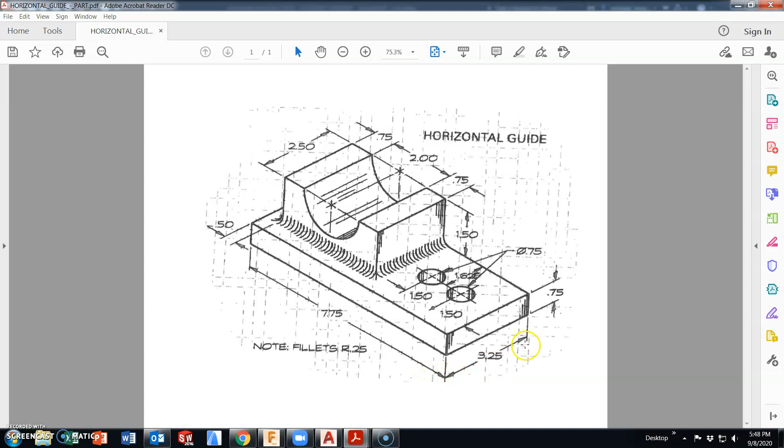For this tutorial we will be looking at the horizontal guide, which you were given a handout that looks like this. Front view has an overall length of 7 3/4, with a width of 3.25 and an overall height of 2.25. This is the one we're working on throughout this demonstration, and with the time allotted, we hope to get to this point.

One of the new things will be adding fillets, which are a radiused arc, and also creating center lines for the holes. That shows the vertical axis, letting you know from this view that this is a cylindrical cut instead of a rectangular cut.

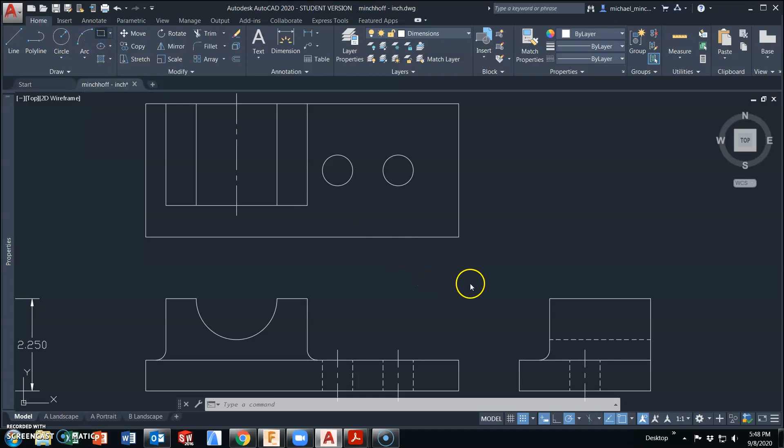So, start off with some view layout with a rectangle at 7 3/4 with an overall height of 2.25. I would put about 1.5 inch spacing in between the views, and we have an overall width of 3.25.

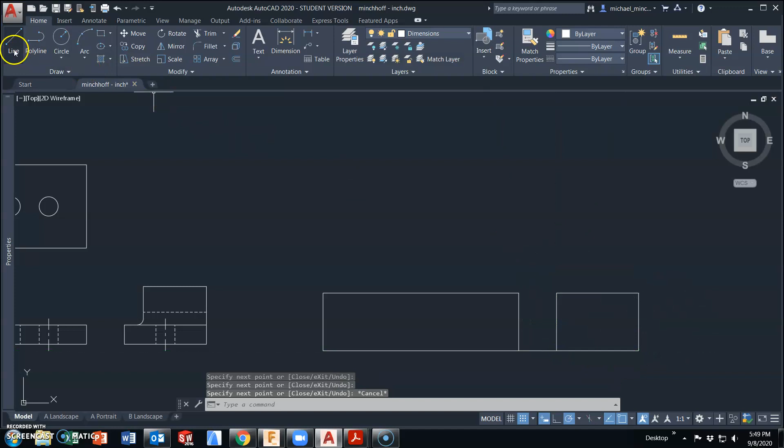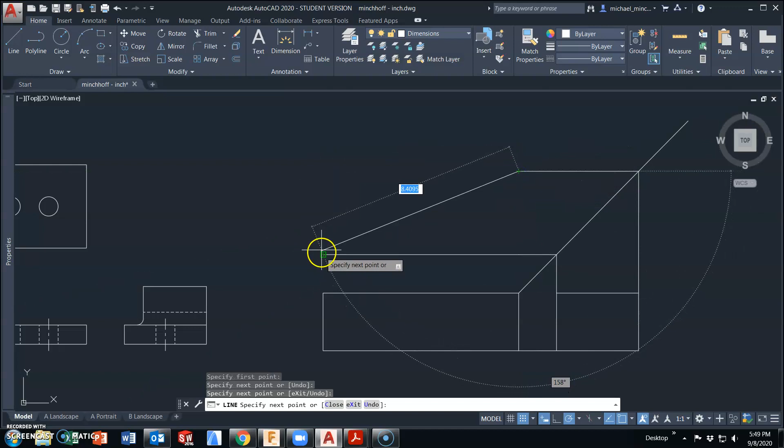From here, it's just a matter of projection for the top view, using a 45-degree angle for our orthographic projection. Set my length, set my width... that line went a little long.

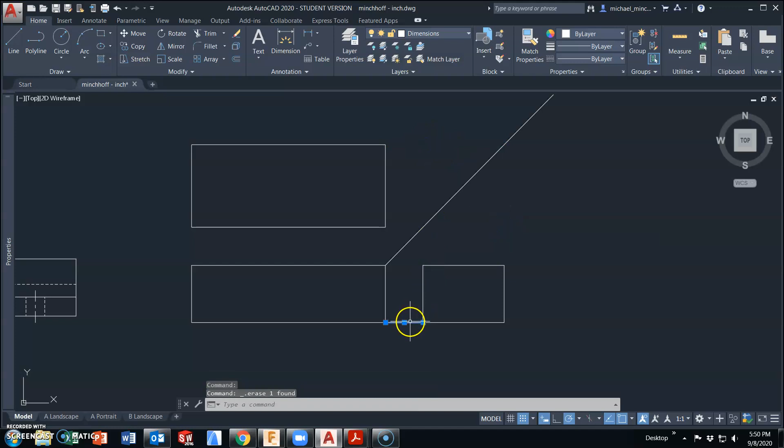So top, front, and right side view, overall length, width, and height have now been projected. Not working outside of these boxes.

Being that this was a rectangle, I am going to explode it because I am going to start moving some of these lines around. To set that base elevation that is 0.75, if I tab, I can change to the overall length of the line.

0.75. Now I can measure in 1/2 inch and back up. Stretch this one short. This line, if you take the 0.75 plus 0.75 plus 2, you will get an overall length of

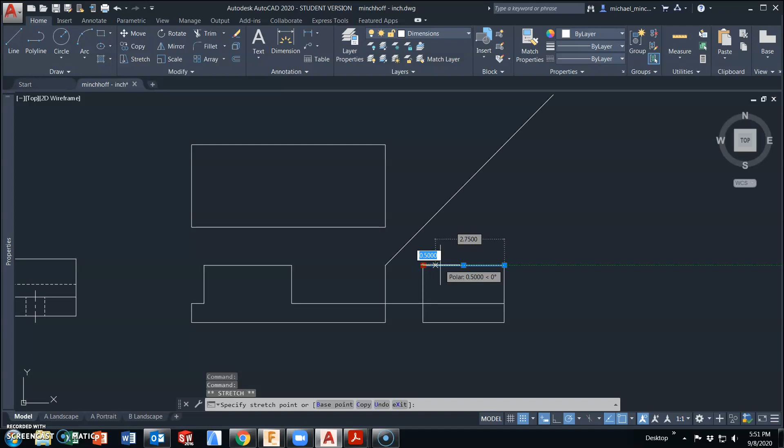3.5, which now this can come up over and project it to the right side. On the right side, we want to drag this back 3/4 inch, and we'll project straight down.

Project this upper feature, which will eventually get an arc in it. I'm going to project it now, not to the midpoint. And I'm just going to take out some of these projection lines to clean this up.

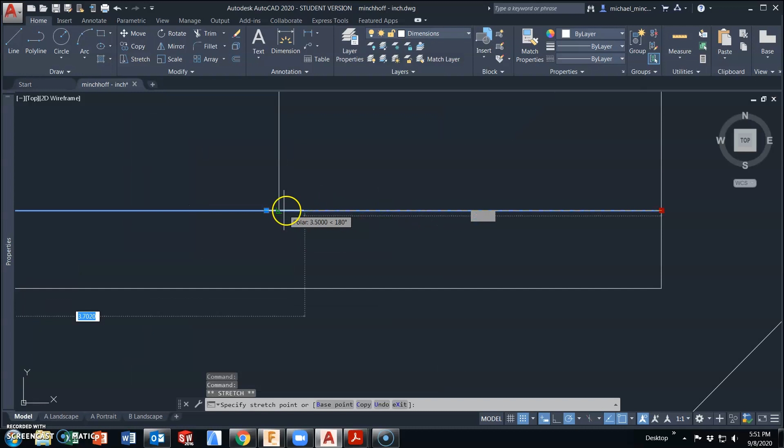Stretch that one, and that's a projection line. So is this one. And this line does go all the way across.

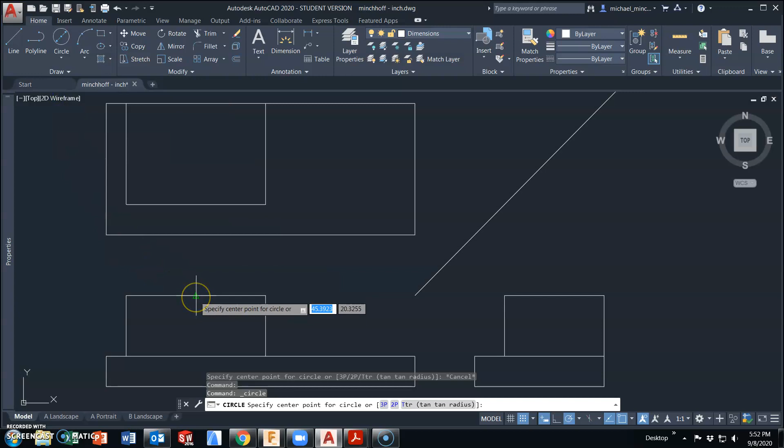For the arc, I do know that the diameter is 2, so I'm going to start with a center point at a diameter, and I'm going to set a diameter of 2 inches, and this will then project straight up, which this should be 0.75, which mine is.

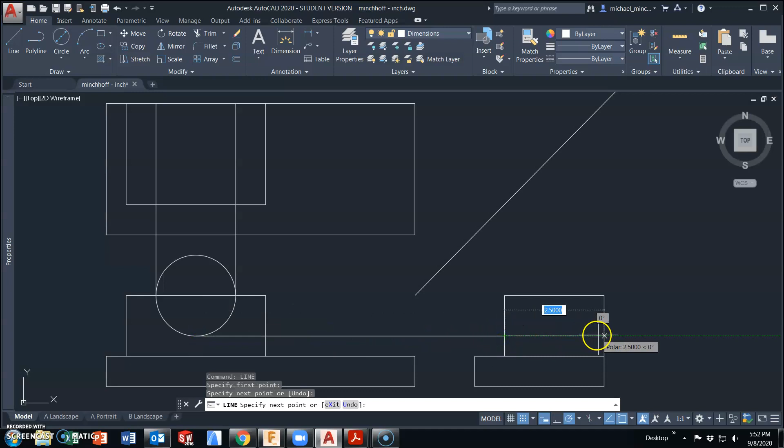And the bottom of the circle is going to project over. This will be a hidden line in the right side view, which we will change momentarily.

Do all those line changes at once. I'll get rid of these lines of projection. I'm going to trim this one out. Bounding body, top half of the circle, trim, select the bounding body and the line that goes across the middle.

I have two holes that are in this top view. Use the midpoint. Measure in 1.5 - that's the center of the one circle, and the distance between centers is 1.5. By using the midpoint, I can eliminate having to measure that distance.

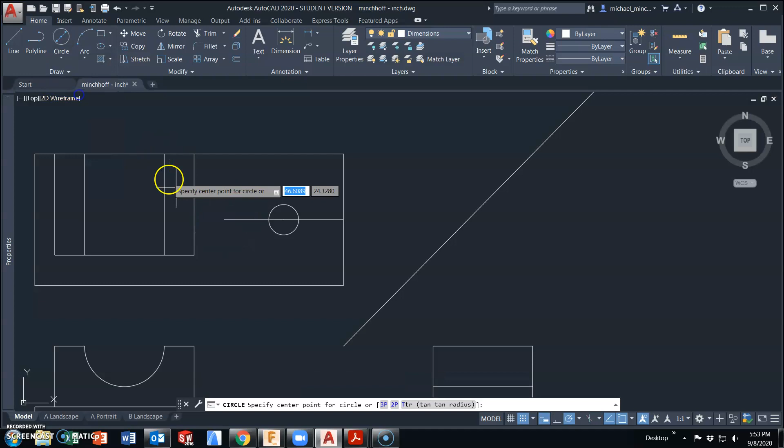From here, all that's really left is projection. I'm going to demonstrate using the copy tool, because making these hidden lines and center lines

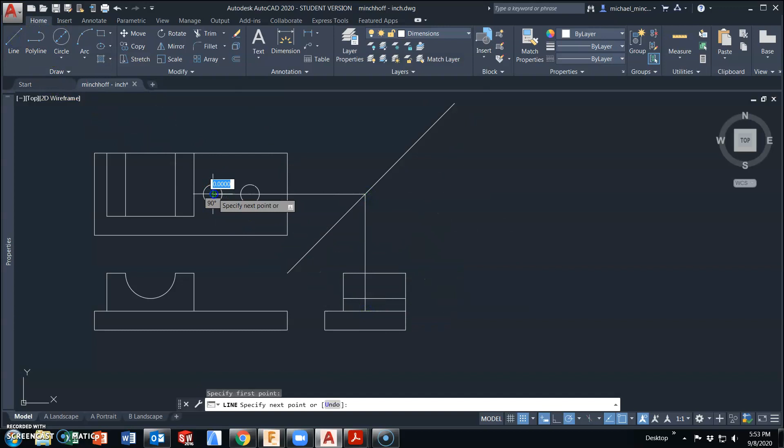to demonstrate or to represent all these holes with the hidden lines can be quite tedious and time consuming. If I make it for one, since all the holes are the same size, I can save myself quite a bit of time.

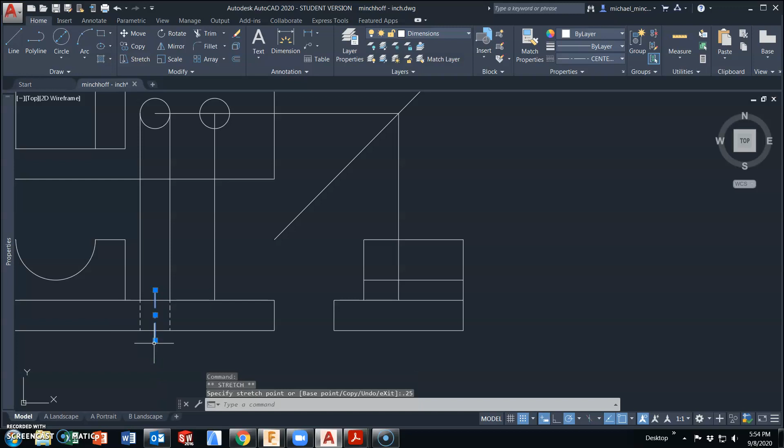So I've projected. This will be a hidden line. Hidden 2. This will be a center line. I have already loaded the center line type, and that needs to extend out past the object, and I'm going to extend it 1/4 of an inch just to make it consistent. The line type shown up is long dash, short dash.

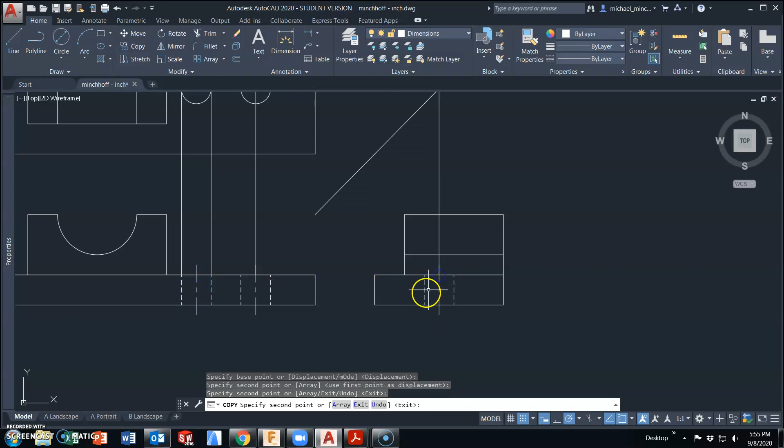So instead of doing that process here and here, I'm going to copy this. Right click, copy selection, use a like reference point, and I have projected that circle, that drilled hole, to both the front and the right side view.

Another hidden line. And all we should have left is a center line in the top view. So this is a center line type, and it needs to extend past the object.

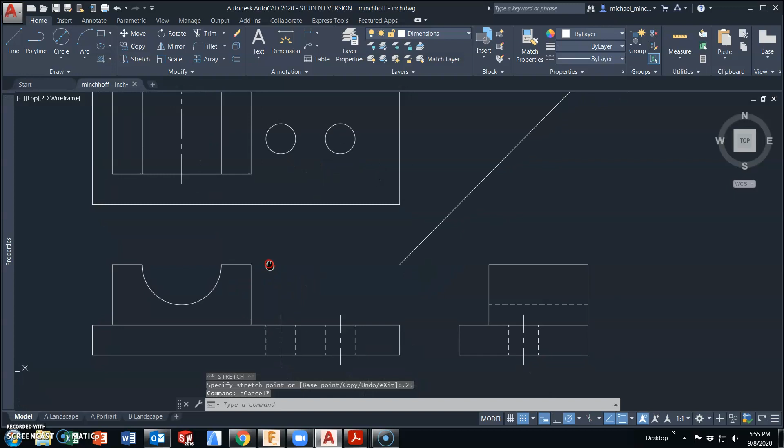Since we used a 1/4 inch for the other hidden lines and center lines, we'll extend another 1/4 of an inch to keep it consistent. Center marks - this can be found in the Annotate toolbar.

Another option is with the dynamic input on. I'm just going to start typing in center mark - the tool appears. Arc, arc, arc. This one, the extension lines continue into the object line,

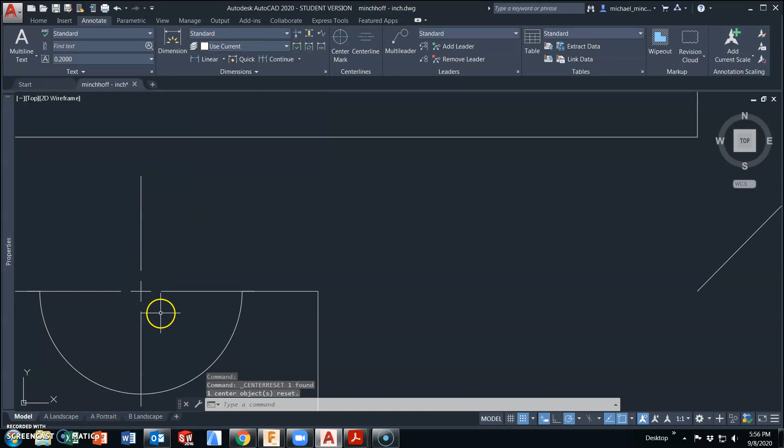which you can turn off. Just dragging them back to change the extension line length.

From here, all we have left are fillets, which we want to round off the intersection between these two, and these two.

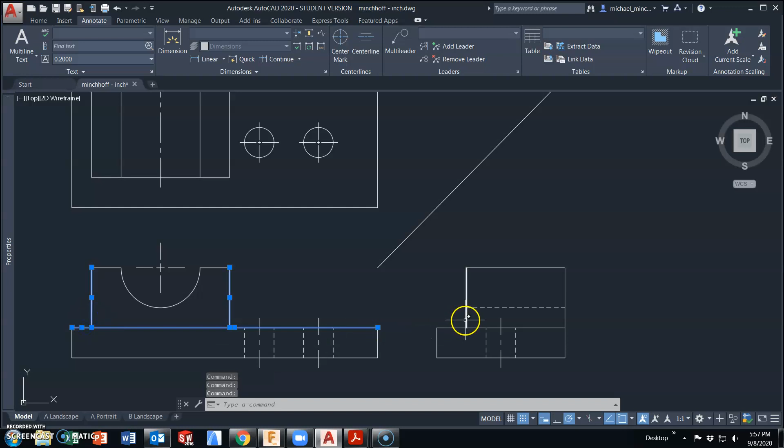So you have a fillet option in your Modify toolbar. The first thing it is asking you for is how do you want to construct it - radius. When we use the fillet tool, radius all the time, so I typed in R. Now it's asking me for the radius, and that radius is 0.25.

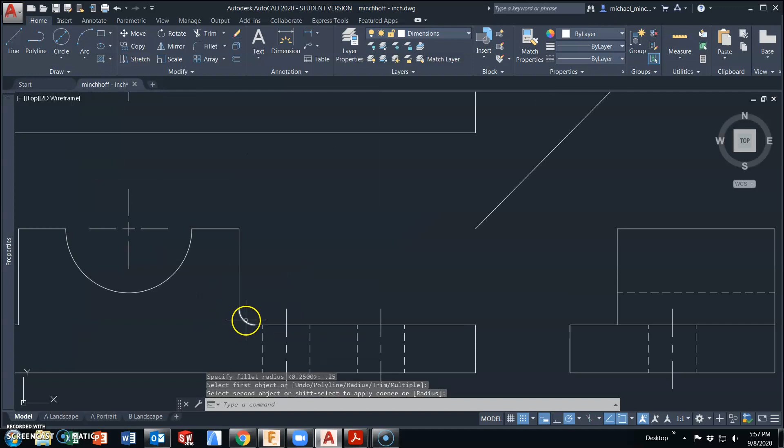After I input that, I am selecting the two lines that I want to arc together. Now this time it stretched it back.

This is a feature of the fillet tool. I don't know why it happens. It will happen again. All I have to do is stretch the straight line to continue it.

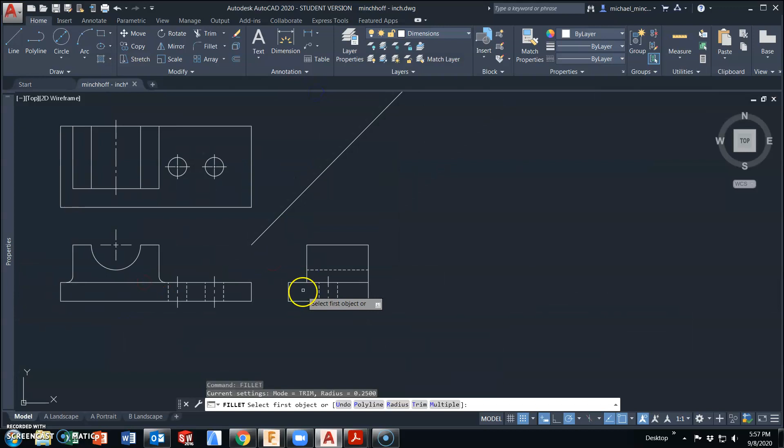And since I just used the fillet tool, it's already on radius. It's already 1/4 inch. See, that line went away - just stretch this back across.

So overall structure for the horizontal guide: projecting views, hidden lines, and center marks.